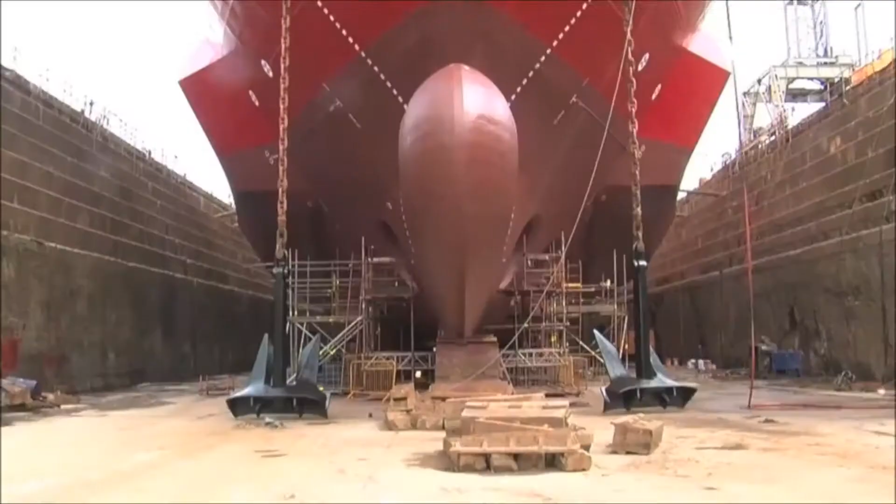Over the last decade, Falmouth Harbour has been in decline, and many of its facilities, such as the helipad, are overgrown and dilapidated. Due to this, it has lost trade for many of its businesses, such as the ship and super yacht repair companies. One of the biggest drawbacks from the cruise industry is that large cruise vessels must tender in tourists due to limited draft access to the port.

As Falmouth Harbour has very few leisure facilities and a shortage of luxury marinas, Falmouth Harbour has much potential, but little of it is utilised. With Falmouth Harbour Commission as our client, EME aims to unlock the potential of this historic port. These reasons clearly show a demand for a redevelopment at the Port of Falmouth.

Hi, I'm Owen Cree Smith at Eco Marine Engineering. As part of the redevelopment of the Port of Falmouth, many aspects of both the industrial and new leisure sector have been outlined as vital to the redevelopment. These aspects have been designed either in detail or as an outline by EME.

In terms of the entire harbour redevelopment, an integration of lean techniques has been outlined for the industrial side, leading to more efficient and cost-effective port operations. In addition, improved transport links have been outlined to allow the growth of the port. Another outline design undertaken by EME includes a green harbour across the redevelopment, including helical wind turbines, solar panels and efficient lighting.

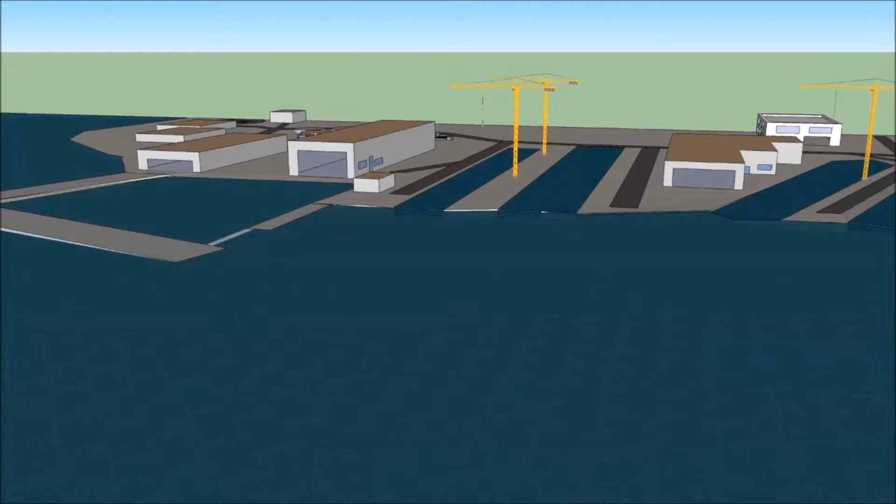In terms of the industrial side of the harbour, two of the key outline designs are the upgrading of both the ship and super yacht repair facilities. These elements are significant to trade within the harbour and are of major interest to key stakeholders. The upgrades include improved warehousing facilities, dry docks, and the inclusion of new cranes where required.

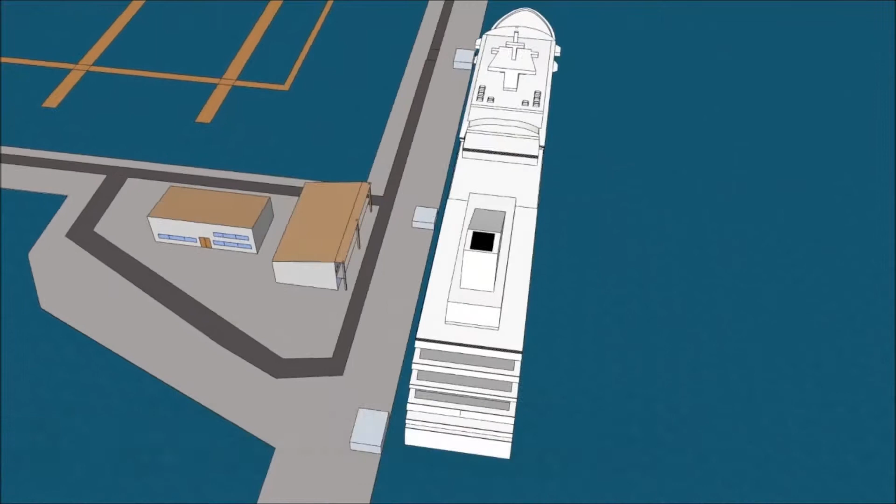A major aspect of the super yacht repair upgrade is the addition of a new dry basin. In addition, a fully equipped renewable research facility has been outlined by EME. This will enable the existing renewable research centre in the harbour to improve and get involved with new projects.

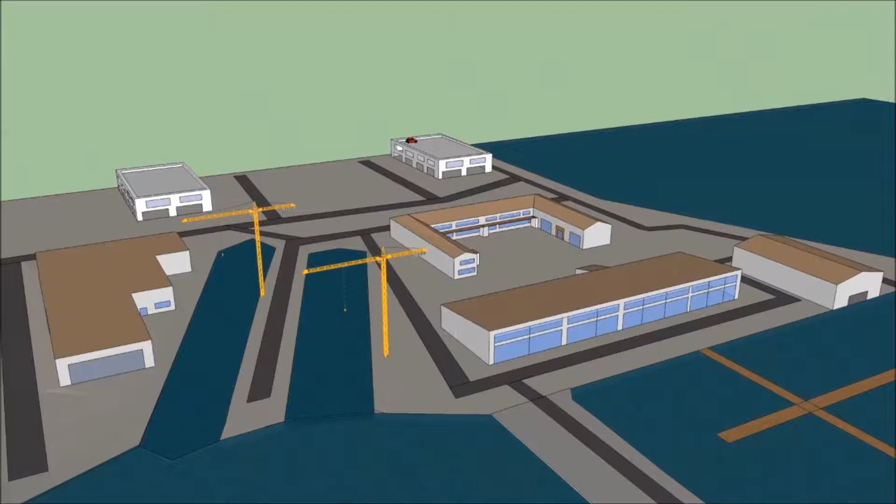Imperative to the implementation of lean within the industrial sector is the extension of the eastern breakwater. This will vitally add docking and other crucial facilities for the industrial sector. The ammonium nitrate storage has also been considered; this will be relocated underground as part of the redevelopment in order to allow space for added leisure facilities.

Moving on to the leisure side of the harbour, a new facility has been designed that includes residential housing, a range of shops and waterside restaurants. This new complex will draw in local customers and improve the image of the harbour to the surrounding town.

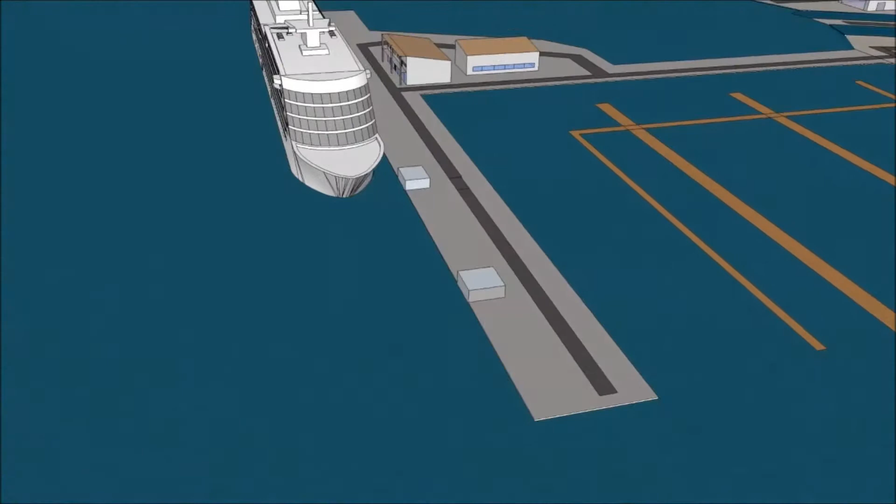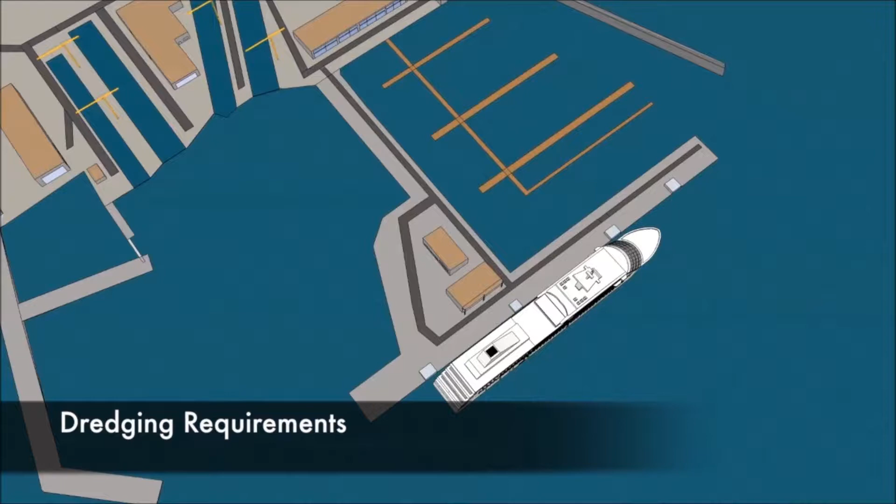Cruise docking on the extended northern wharf will also allow trade within the harbour to improve and expand, including a state-of-the-art welcome terminal that will organise local excursions for visiting tourists. Vital to the improvement of the entire marine-based side of the new harbour will be the dredging. This includes the docks and channel being deepened to mitigate the current draft limitation on the port.

EME has additionally taken on two key elements as detailed designs for academic purposes. The first of these is concerned with the civil and coastal aspects of the harbour, where a new marina, extension of the northern wharf, and implementation of the western arm breakwater requires protection.

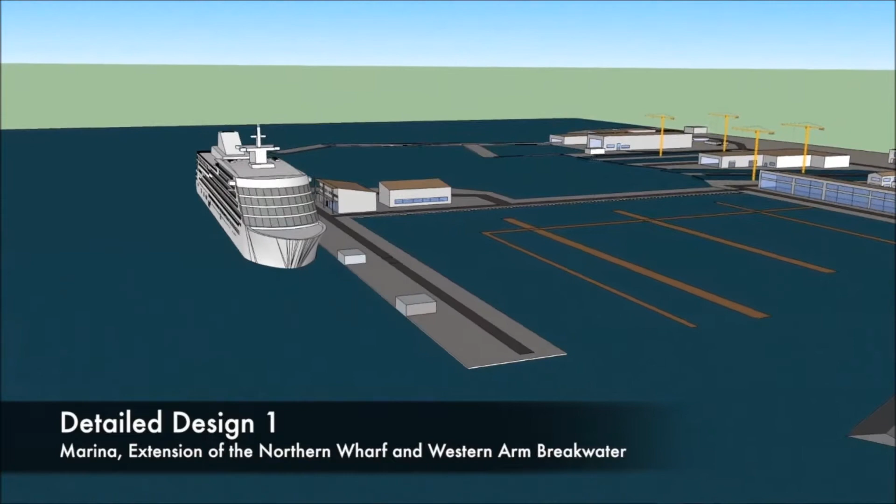The new marina allows docking for both leisure vessels and, when required, super yachts. The extension of the northern wharf is required for the docking of new cruise vessels, while the western arm is required for coastal protection of all aspects in its lee.

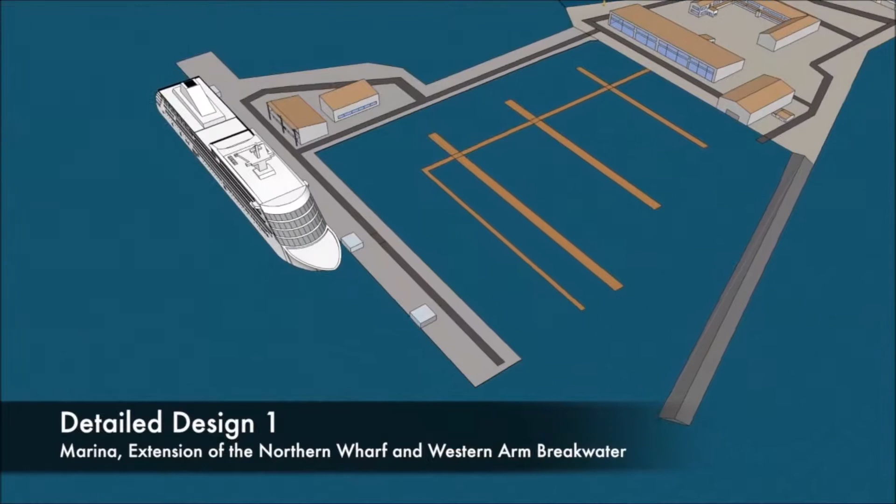The second detailed design is the new dry stack facility, which will store leisure craft vessels out of the water in a sheltered warehouse. A unique aspect of EME's design for this facility is that it has been designed to be fully automated to save on labour costs and to provide a unique edge to the Falmouth area.

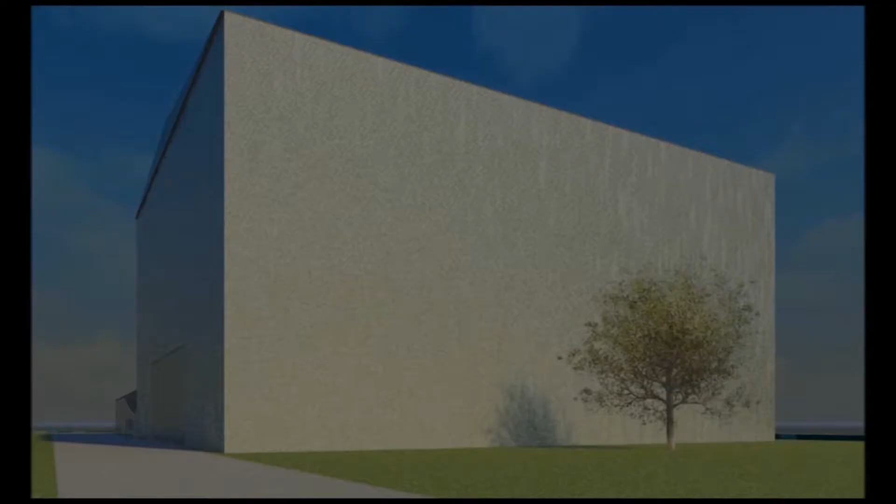The dry stack facility encompasses many additional buildings and amenities. These include a private slipway, a vessel maintenance building, facility offices and a trailer storage park. Moving into the main dry stack building, this warehouse will have the capability to store 100 vessels up to 10 metres in length and up to 5 tonnes.

The launch and recovery system will utilise a floor-mounted rail system, where an automated forklift will collect and launch a boat. Likewise, the system may load the boat back into the storage facility, as well as allowing human input to clean and flush the vessel. This will all be undertaken via the design and control system.

EME will remain at the forefront of the redevelopment throughout the implementation, providing a link between the stakeholders and construction contractors. The Port of Falmouth must remain functional and operational, reducing the risks of business, diverting to alternatives, and also maintaining cash flow.

The aims of the transition are to convert all designs into final products of high quality, conform to British standards and Euro codes, notably in the structural design, wind loadings, achieved through accredited contractors, maintain good relations with key stakeholders, and create sufficient documentation to clarify the transition process.

The presence of ammonium nitrate at the site creates a number of issues due to its classification as a dangerous substance. A number of SI standards are therefore employed to ensure this is handled correctly by using certificates of contractors.

The redevelopment will be completed in 3 years. Organisationally, approximately 6 months is required to finalise plans and perform the initial site surveys. Following this, a period of site mobilisation to install infrastructure and accessibility must be completed.